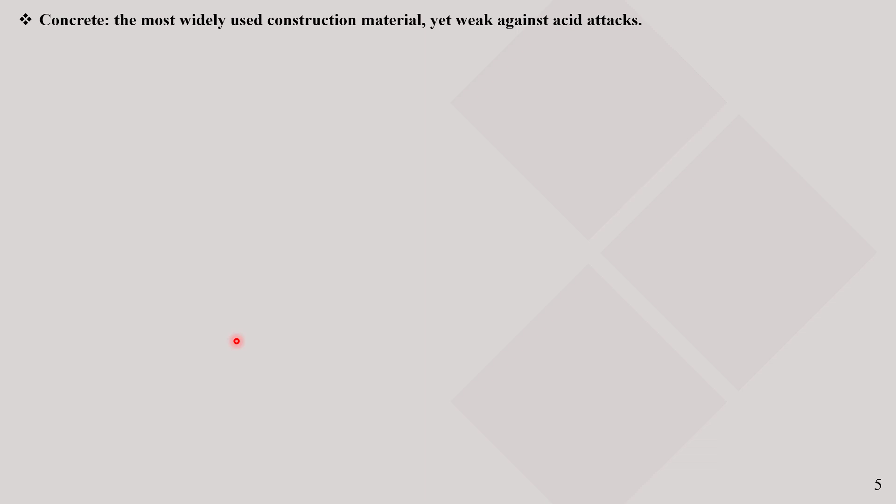Chapter 1: Introduction and Problem Definition. Concrete is the most widely used construction material. However, by nature, it performs poorly when exposed to acid attacks.

In today's world, the expansion of industries has led to an increase in pollutants, causing the acidification of water, soil, and air. This phenomenon results in acid rain, which poses a serious threat to both ecosystems and structures.

When acid rain comes into contact with concrete structures, it reacts with the compounds in cement, leading to porosity, cracking, and a reduction in the durability of the concrete.

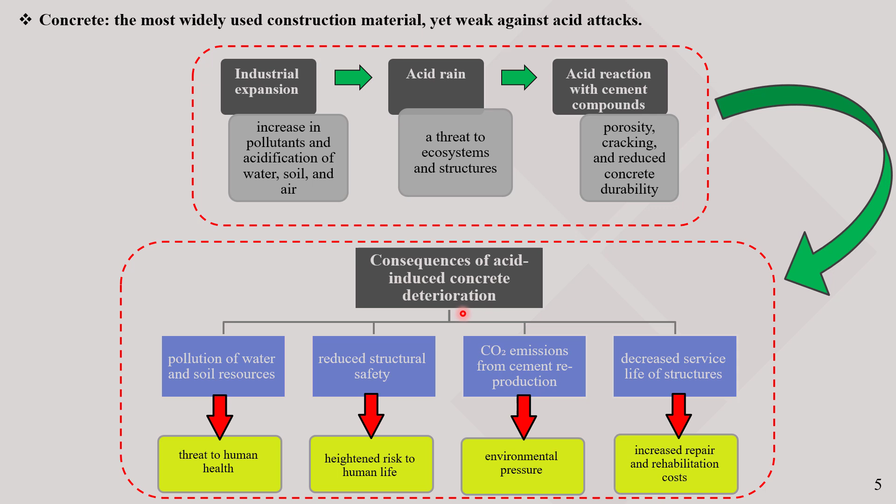These effects bring about several consequences: reduction in the service life of structures, increased CO2 emissions due to the need for additional cement production, decreased structural safety, and pollution of water and soil resources.

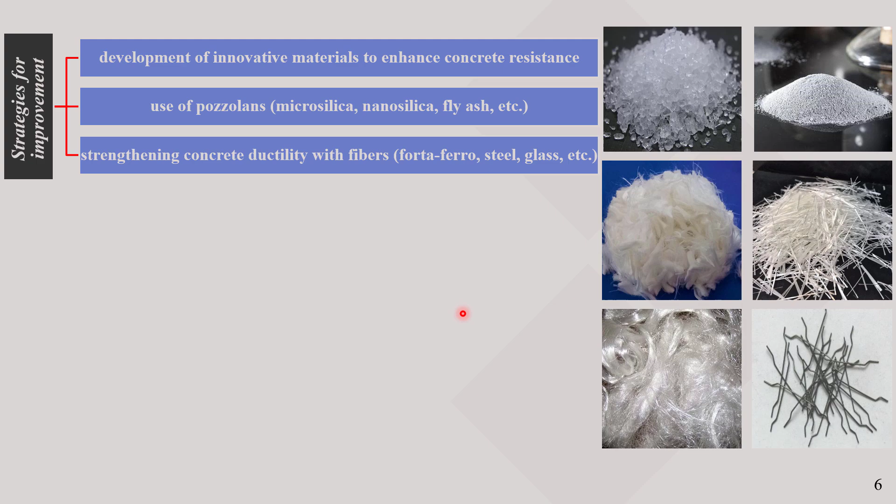There are several strategies to improve this situation. One solution is the use of modern materials. Another approach is the use of pozzolans such as microsilica, nanosilica, or fly ash. A further method is the use of fibers to enhance the ductility of concrete sections, such as steel fibers and glass fibers.

In this research, microsilica was selected as the pozzolan and Forta-Ferro fibers were chosen as the reinforcement, because Forta-Ferro fibers demonstrate good resistance in corrosive and alkaline environments.

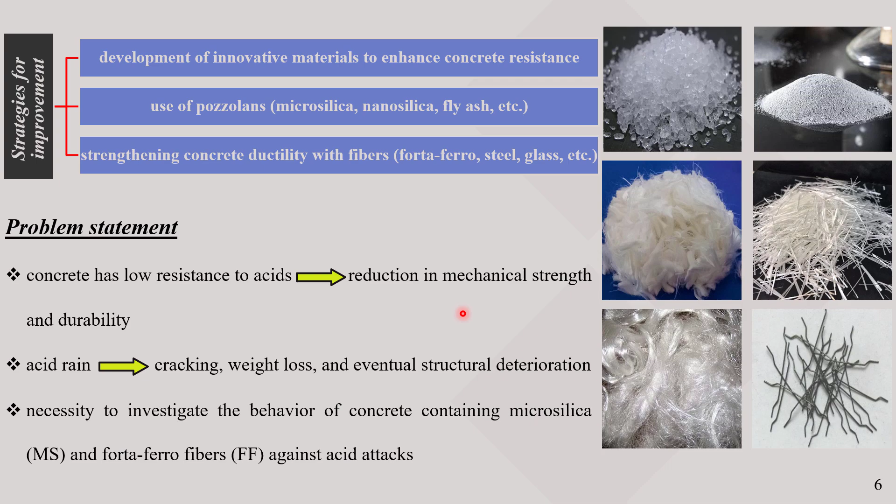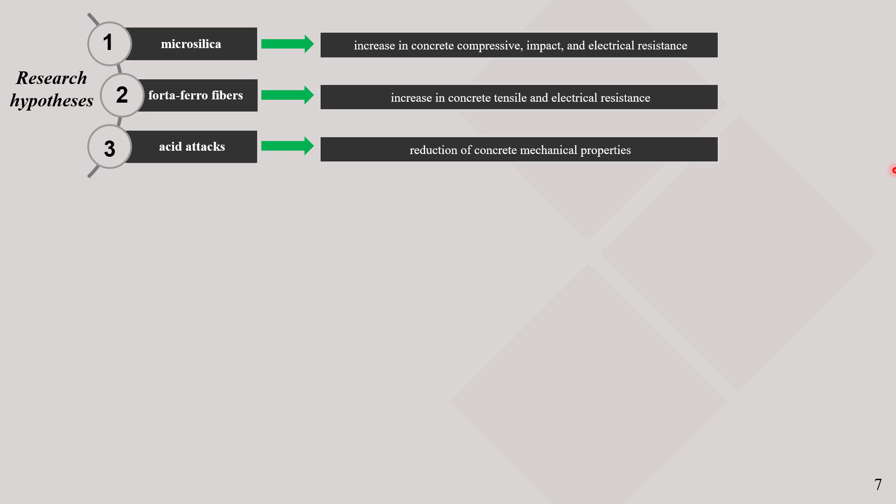Three main hypotheses were considered in this research. The first is that microsilica increases the compressive, impact, and electrical resistance of concrete. The second is that Forta-Ferro fibers improve the tensile and electrical resistance of concrete. The third is that acid attacks reduce the mechanical properties of concrete.

Accordingly, three main objectives were defined. The first was to investigate acid attacks and the compressive, tensile, impact, and electrical resistance of concrete containing microsilica and Forta-Ferro fibers. The second was to monitor physical changes in the concrete specimens, including weight, height, and diameter. Finally, the third was to provide a comprehensive picture of the behavior of modified concrete, in order to determine whether the combination of pozzolans and fibers can be effective, useful, and beneficial.

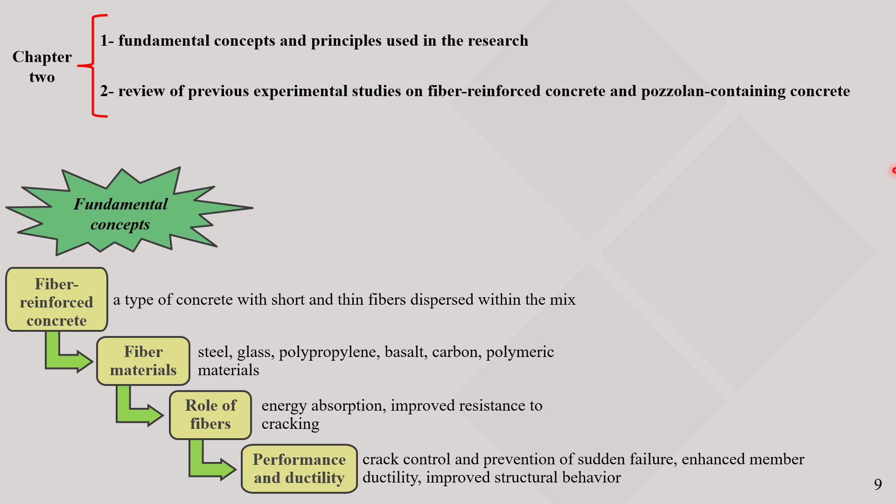In Chapter 2, we focus on the fundamental concepts and research background. First, we start with the basics of fiber-reinforced concrete. Concrete without fibers is referred to as plain concrete. The fibers can be steel, glass, carbon, or other types.

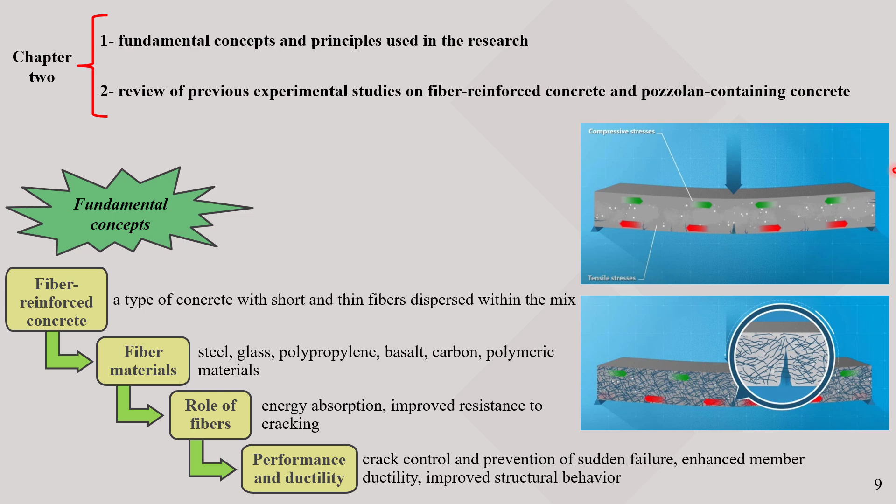The role of fibers is essentially to absorb energy and increase resistance to cracking. As shown in this figure, a force applied to a beam causes cracks in the tensile zone of the beam. If the beam is reinforced with fibers, these fibers can prevent crack propagation or at least significantly delay the formation of cracks.

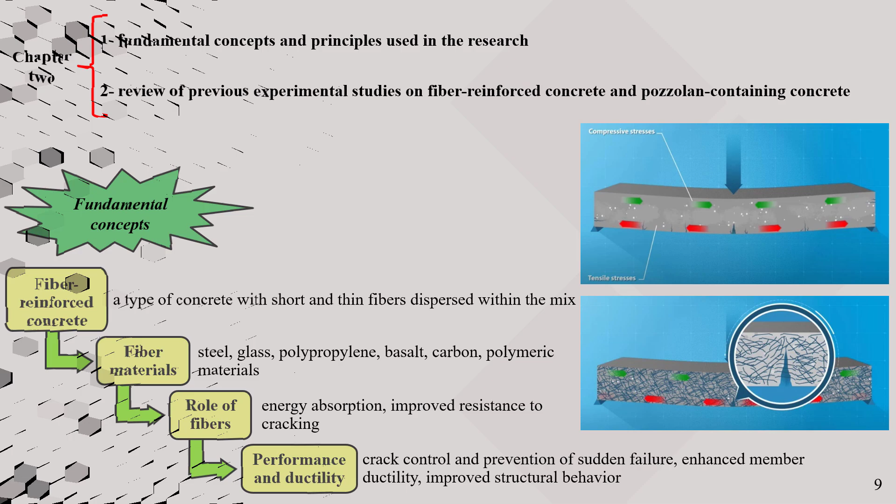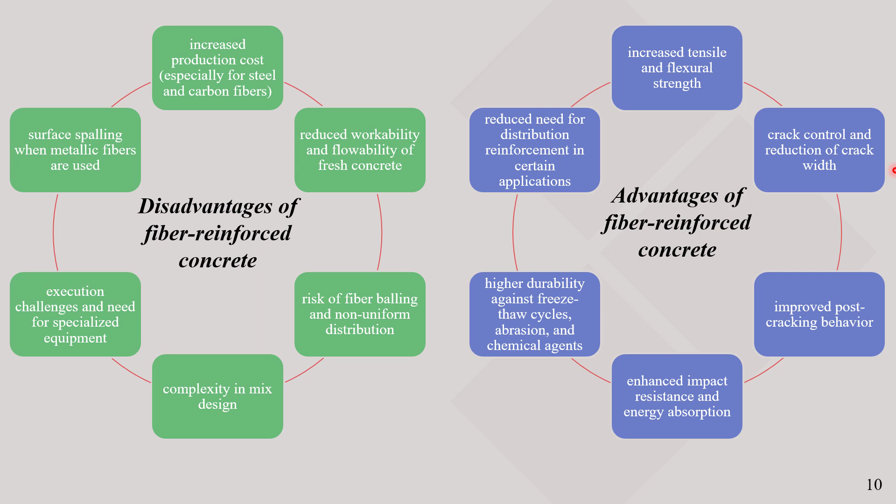Like any other material, fiber-reinforced concrete has certain advantages and disadvantages. The main advantages include increased tensile and flexural strength and control over crack widths. On the other hand, disadvantages include higher production costs, especially when using steel fibers, as well as reduced workability and flowability of fresh concrete.

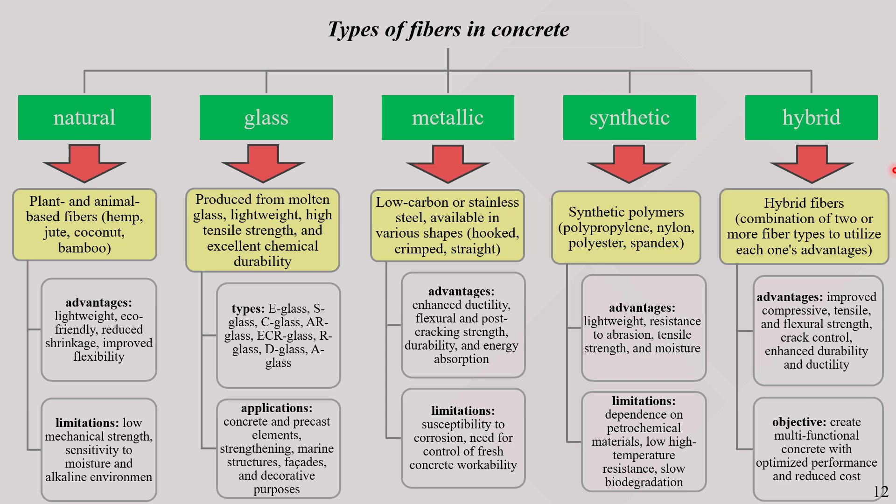Moving on to pozzolans, these are silico-alumina materials that initially have no binding properties but react with calcium hydroxide produced by cement hydration. Pozzolanic materials are categorized into natural and artificial types.

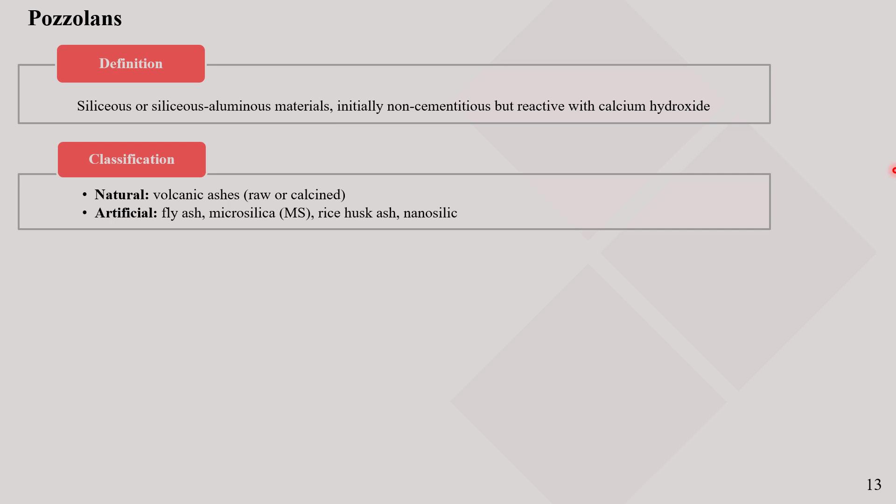Their advantages include increasing compressive strength, reducing cement consumption and consequently CO2 emissions, decreasing permeability, and enhancing bonding between the cement paste and reinforcement.

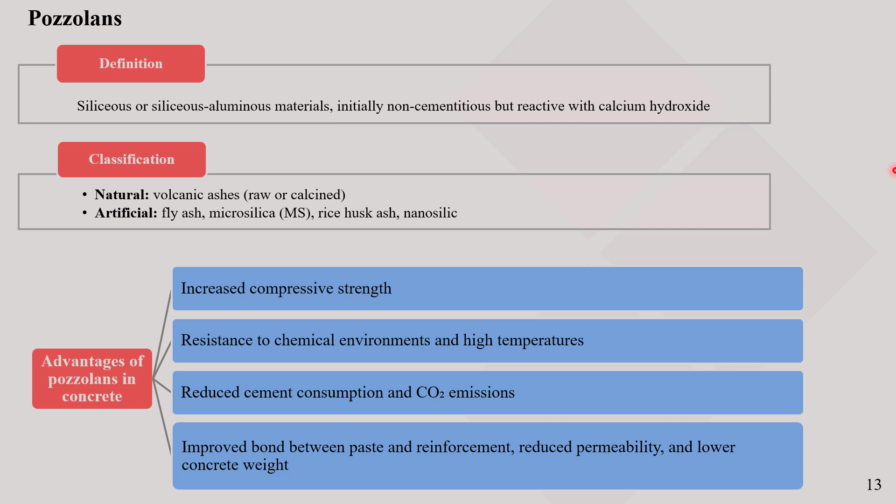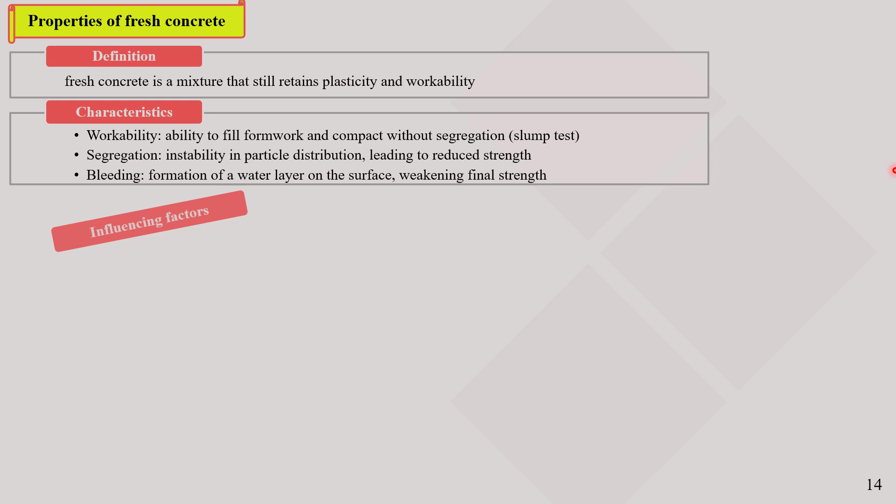Fresh concrete also has specific properties. It should maintain a plastic and workable state and not yet be hardened. Three main characteristics are assessed: workability, segregation, and bleeding. Factors such as water-to-cement ratio, aggregate grading, and curing temperature influence these properties.

In hardened concrete, characteristics such as compressive strength, stress, strain behavior, tensile strength, and modulus of elasticity are important. In this study, we focus specifically on compressive and tensile strengths.

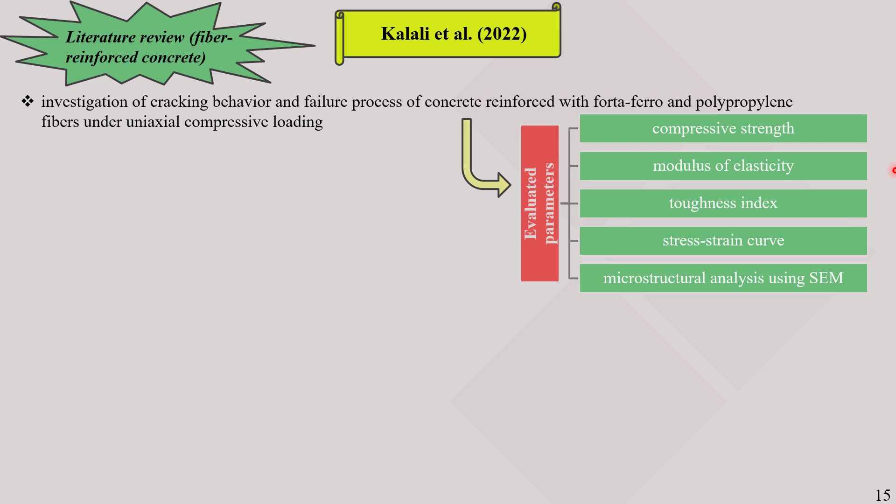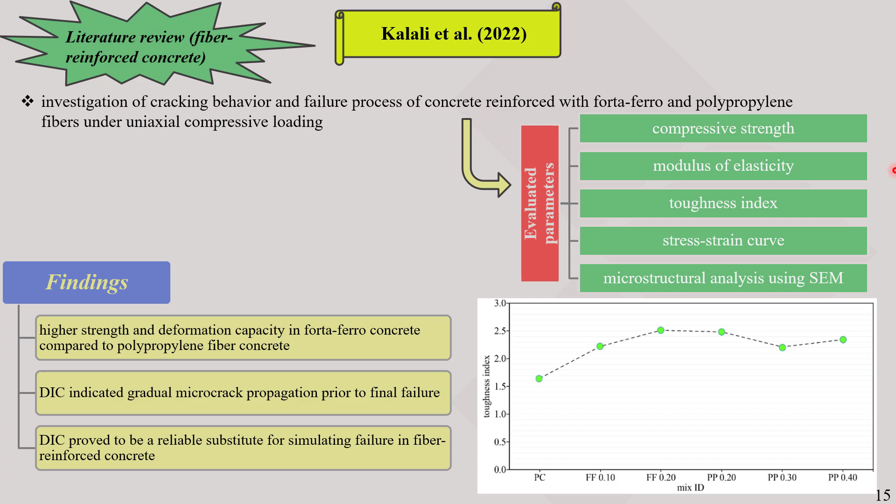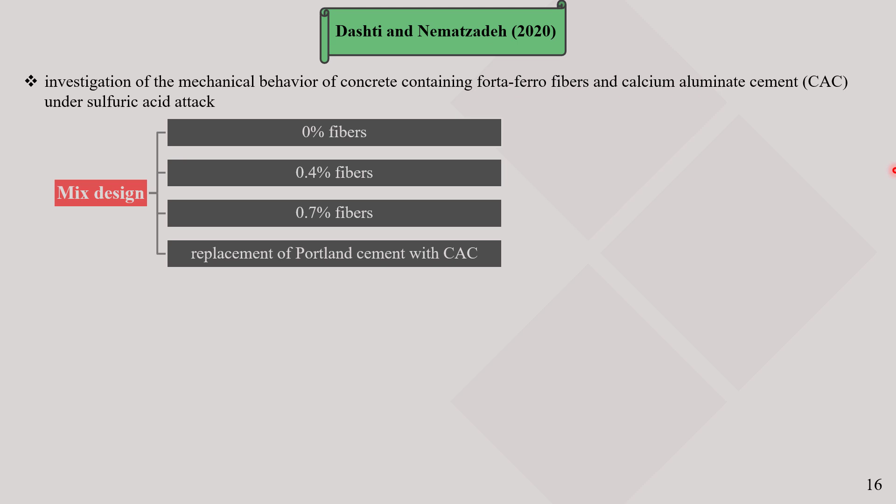The next article was conducted by Mr. Dashti and Nematzadeh. They investigated the mechanical behavior of concrete containing Forta-Ferro fibers and calcium aluminate cement, CAC, under sulfuric acid attack. In the mix design, fibers were used at three volumetric ratios: 0%, 0.4%, and 0.7%, and another mix design involved replacing 100% of Portland cement with CAC.

The key finding was that a 0.4% fiber content could enhance compressive and tensile strength, and full replacement of Portland cement with CAC increased strength by up to 70%. Overall, the acidic environment led to a reduction in compressive strength by up to 30% and tensile strength by up to 20%.

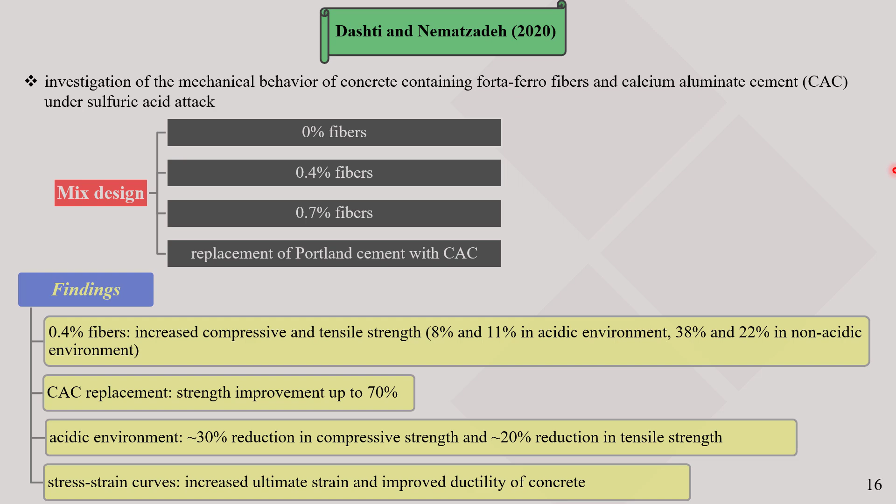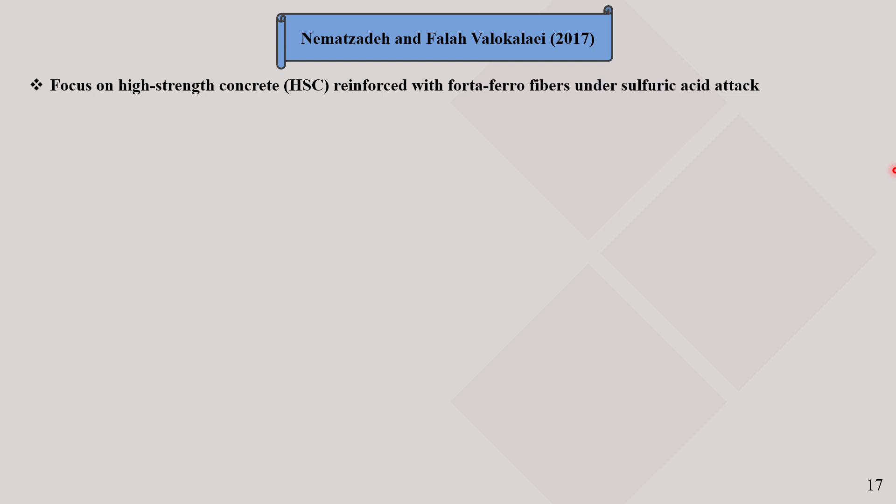The next study was conducted by Nematzadeh and Falah. They focused on high-strength concrete reinforced with Forta-Ferro fibers exposed to sulfuric acid attack. The main finding was that the presence of fibers helped control local cracking and prevented sudden failure.

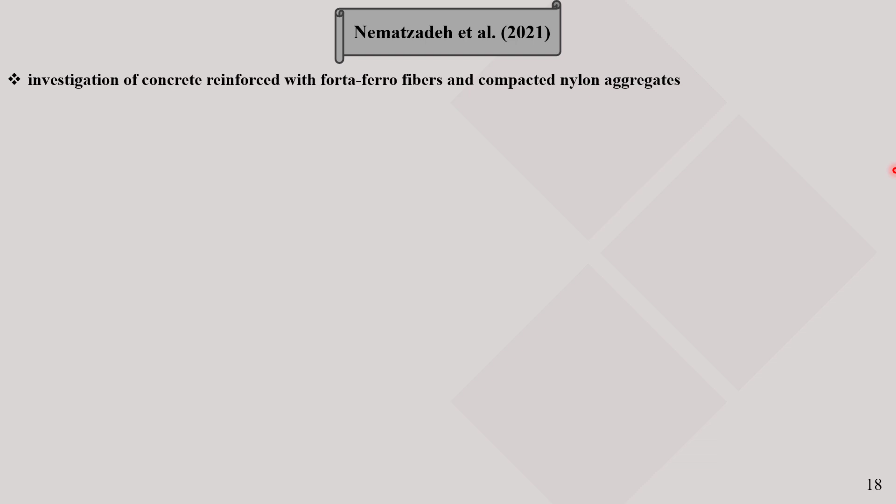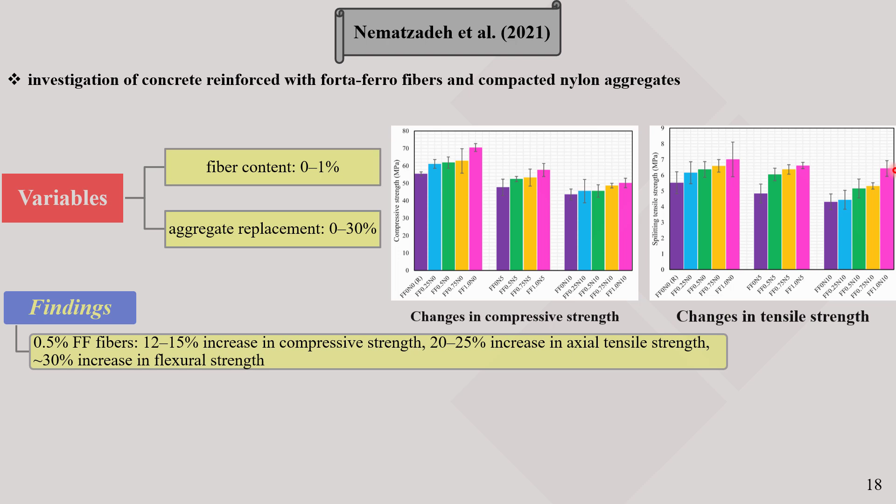Another study by Nematzadeh and colleagues examined concrete reinforced with Forta-Ferro fibers and compacted nylon aggregates. Both the fiber content and aggregate replacement ratio were varied. The key results indicated that 0.5% fiber content increased compressive strength by up to 15%, tensile strength by 25%, and flexural strength by 30%. Additionally, the nylon aggregates reduced permeability and water absorption.

Moving on to the pozzolanic materials studies, the first article was by Mr. Jain and colleagues, who investigated the effects of microsilica on concrete properties. The results showed that replacing up to 30% of cement by weight with microsilica positively influenced concrete strength. A limitation noted was that high microsilica content increased initial and final setting times by approximately 1.5 times. The graphs from these experiments are also presented in this section.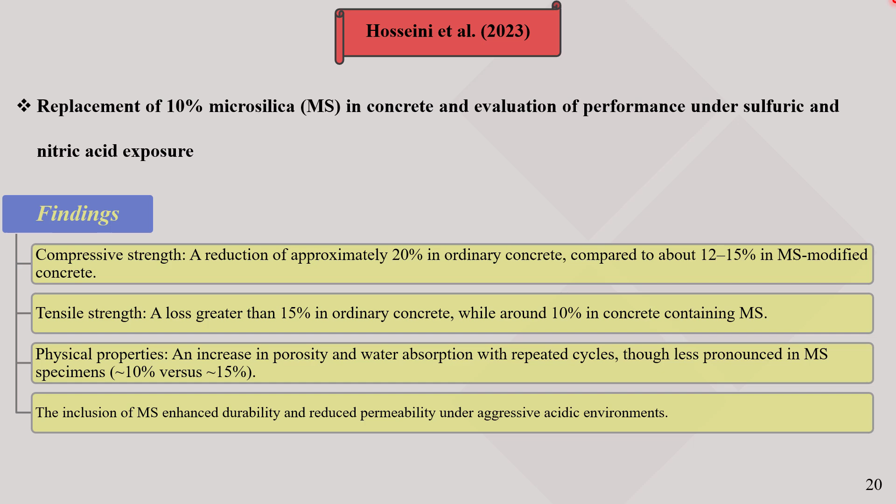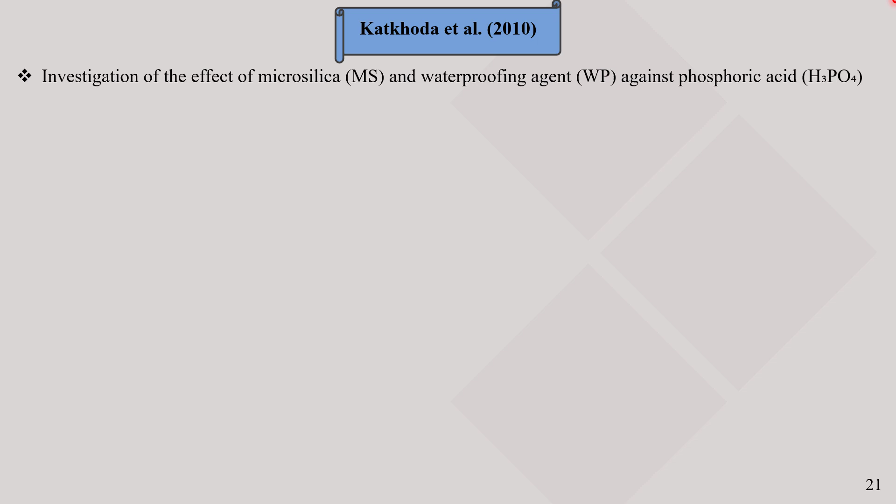Subsequent research by Mr. Hassan Katkhoda and colleagues examined the effects of microsilica and a waterproofing agent against phosphoric acid. Results showed that microsilica alone increased compressive strength by up to 15%, while the waterproofing agent alone reduced permeability and improved durability. The combined use of both materials increased compressive strength by up to 20% and provided optimal performance.

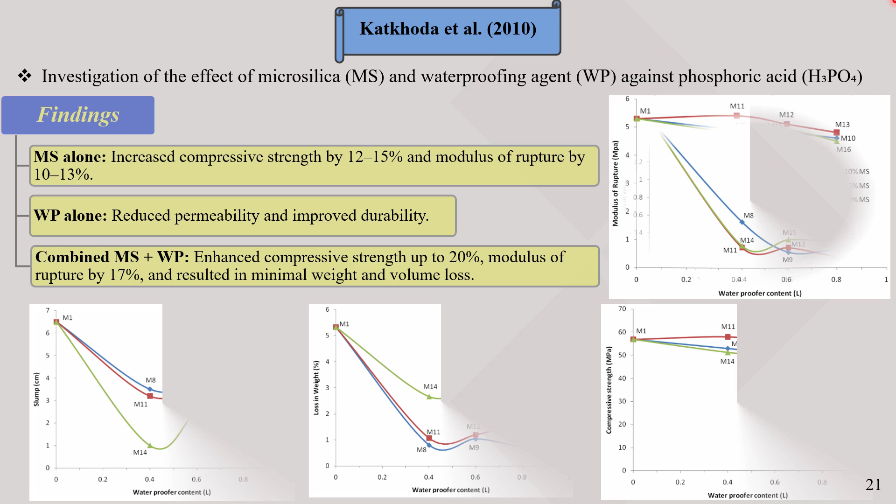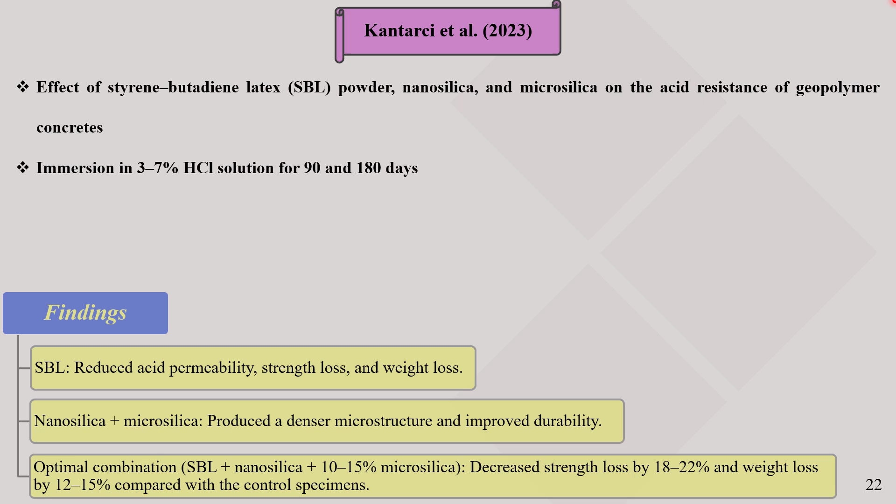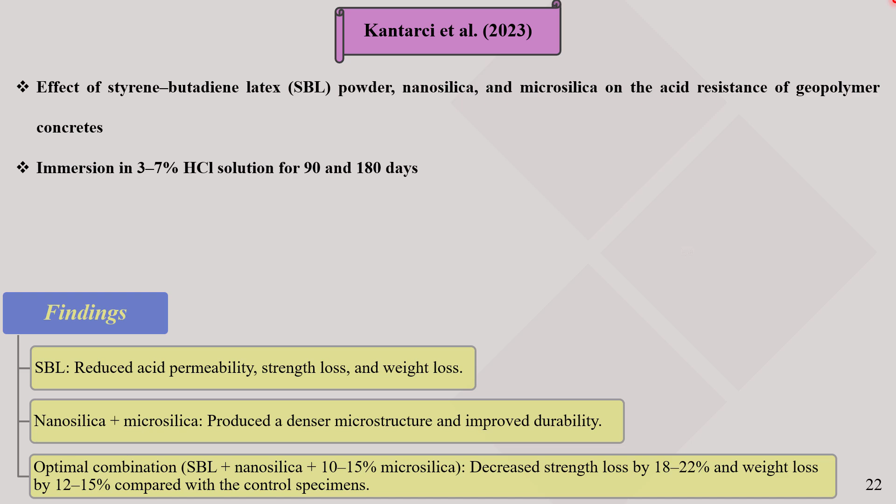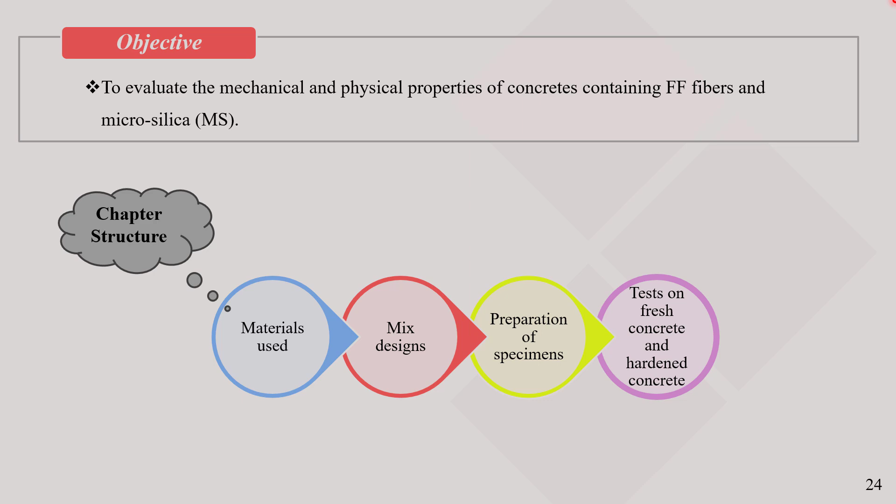Chapter 3, Laboratory Programs. In this chapter, our aim is to investigate the mechanical and physical properties of concrete containing Forta-Ferro fibers and microsilica. The structure of this chapter is organized such that first the materials used are introduced, then the mix designs are explained, followed by the sample preparation procedures, and finally, the tests performed on both fresh and hardened concrete are presented. Materials used.

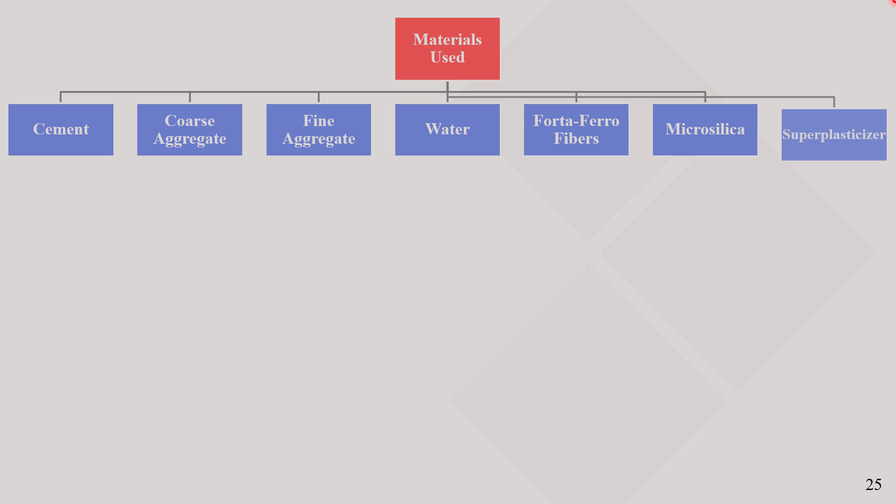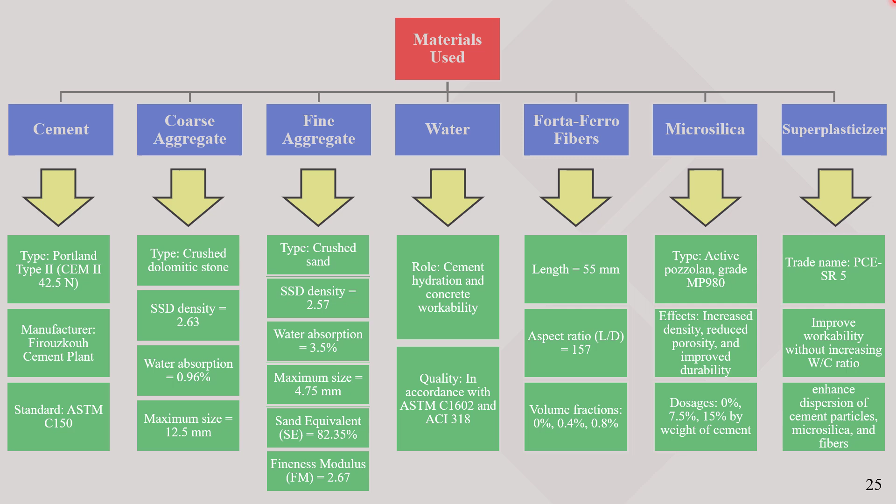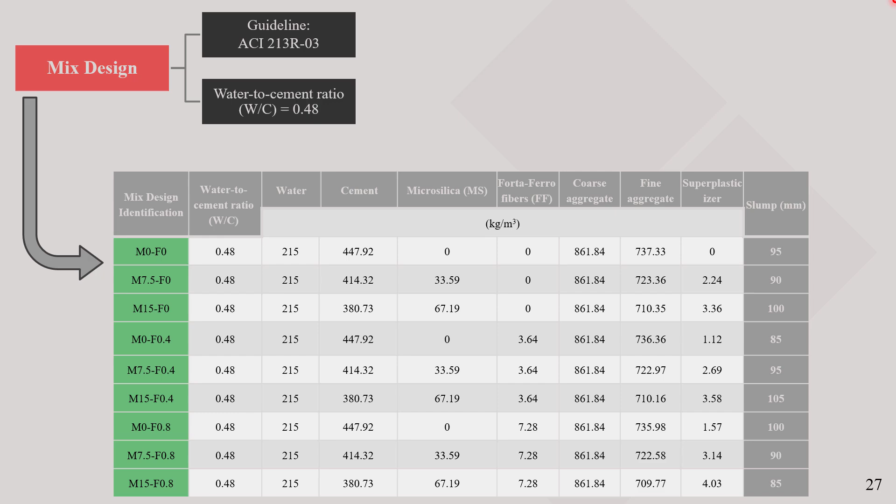Mix designs. The mixes were prepared with a fixed water-to-cement ratio of 0.48. The table includes 9 mix designs. The number for microsilica shows its percentage by weight. The number for Forta-Ferro fibers shows their volumetric percentage. For example, the sample M7.5F0.4 contains 7.5% microsilica by weight and 0.4% Forta-Ferro fibers by volume.

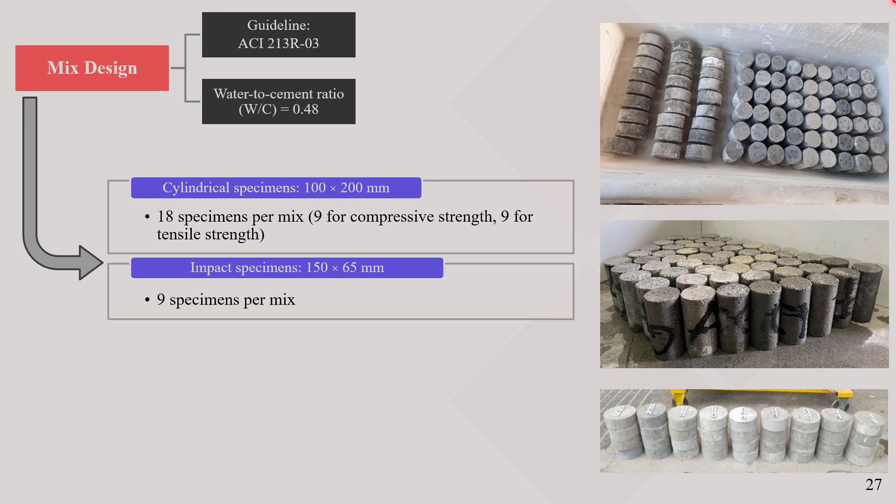Sample preparation: cylindrical samples were prepared for compressive strength, tensile strength, electrical tests, and dimensional change observation. The dimensions were 200 mm in height and 100 mm in diameter. For impact testing, samples were made with 150 mm in diameter and 65 mm in height.

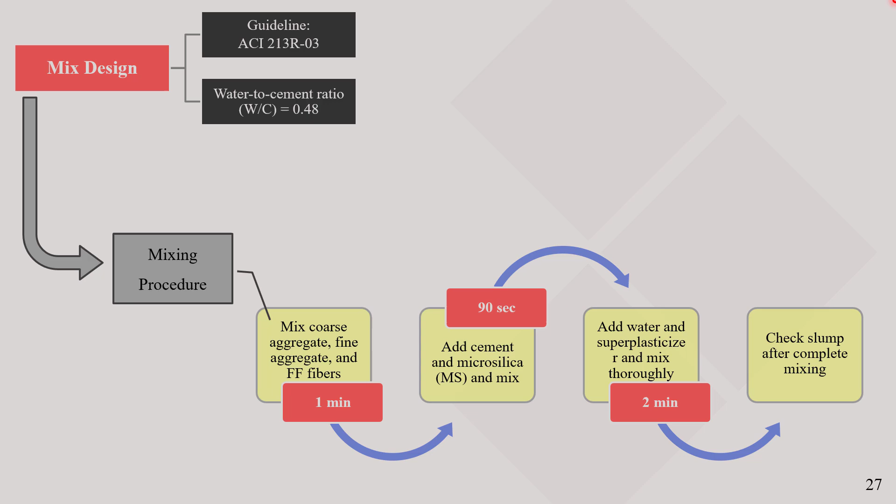Mixing procedure: the mixing was done as follows. First, coarse aggregate, sand, and Forta-Ferro fibers were mixed for 1 minute. Then, cement and microsilica were added. Finally, water and superplasticizer were added. After mixing, the samples were prepared for the slump test. After hardening, the other tests were conducted.

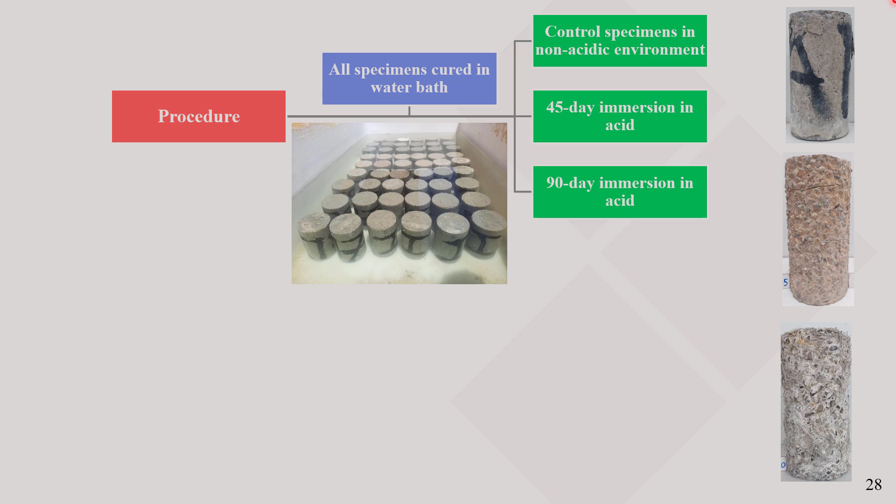Testing conditions: the tests were performed under 3 conditions. First, the non-acidic condition, where samples were tested directly after curing in a water bath. Second, the 45-day acidic condition, where 1/3 of the samples were tested after 45 days of immersion in acid. Third, the 90-day acidic condition, where another third of the samples were tested after 90 days of immersion in acid. Figures show the samples for each condition: the non-acidic sample, the 45-day acidic sample, and the 90-day acidic sample.

Tests conducted: the following tests were done on both fresh and hardened concrete: compressive strength, indirect tensile strength, impact resistance, dimensional changes, and volumetric electrical resistance.

Chapter 4: Analysis of experimental results.

We begin with compressive strength under non-acidic conditions. When microsilica is used alone, higher microsilica content leads to greater increases in compressive strength. Fibers alone did not have a significant effect, but the combination of microsilica and fibers slightly improved the strength and showed good synergy.

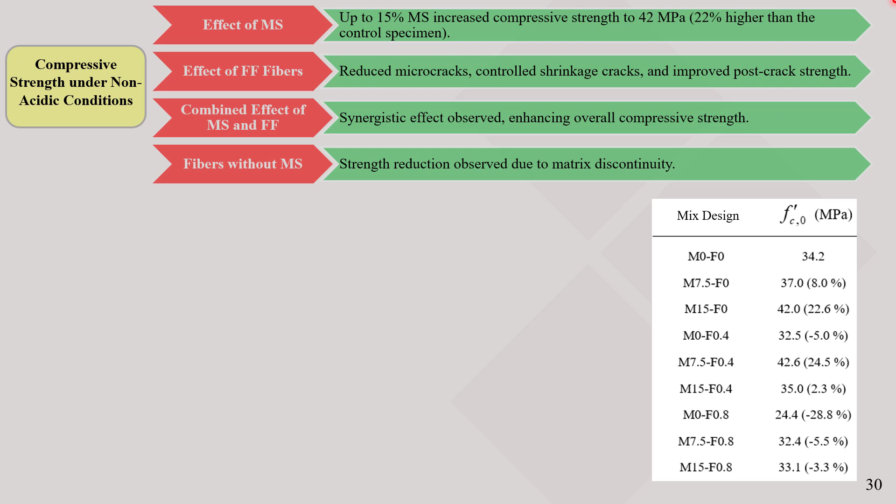Under the 45-day acidic condition, a degradation mechanism occurred. Hydrogen ions attacked the concrete and reacted with calcium hydroxide present in the mix, producing gypsum and ettringite. These secondary products are bulky and reduce the compressive strength. The results showed that higher microsilica content reduced strength stability, while higher fiber content improved compressive strength retention. Therefore, using both microsilica and fibers simultaneously, high fiber content with a moderate amount of microsilica can create a relative synergistic effect. Microsilica increases cement paste density, while Forta-Ferro fibers control cracks and prevent acid penetration.

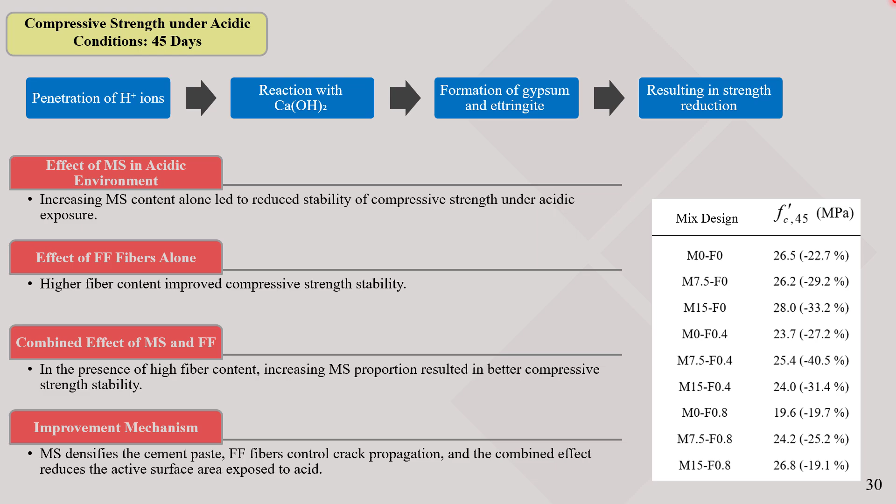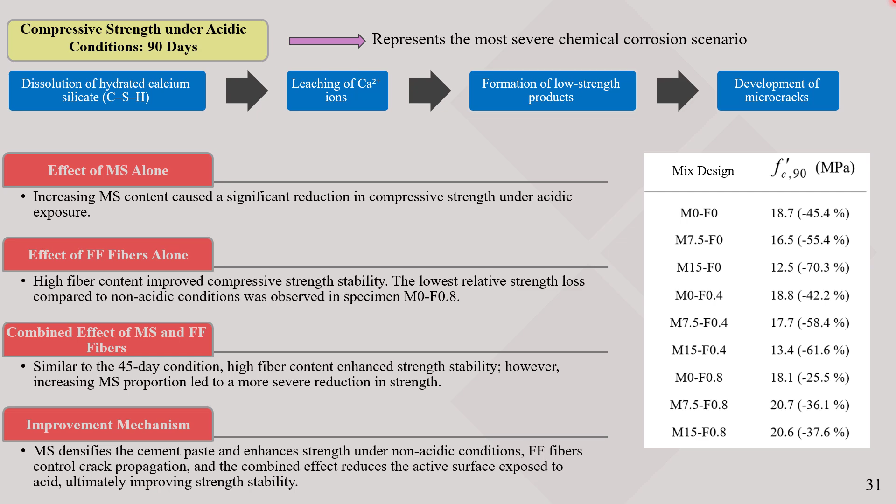For the 90-day acidic condition, the same mechanism occurred, but the chemical attack was more severe. The results were almost similar to the 45-day case. The final conclusion was that combined samples with the highest fiber content performed the best. Microsilica can be used at 7.5% or even 15%, but the fiber content should be maximized.

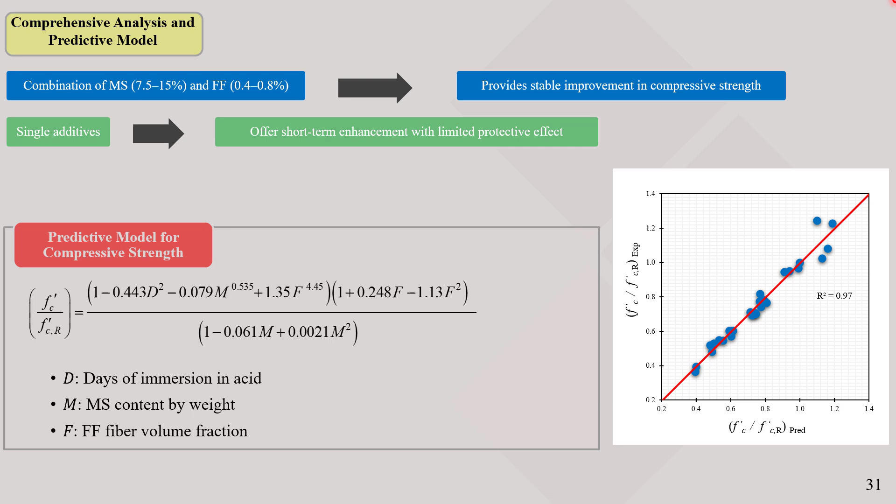For the indirect tensile strength test, 3 factors were influential: the quality of the cement paste microstructure, the bond in the transition zone and stress distribution, and crack control. Under non-acidic conditions, fibers had a positive effect, and the best performance was observed in the combined samples.

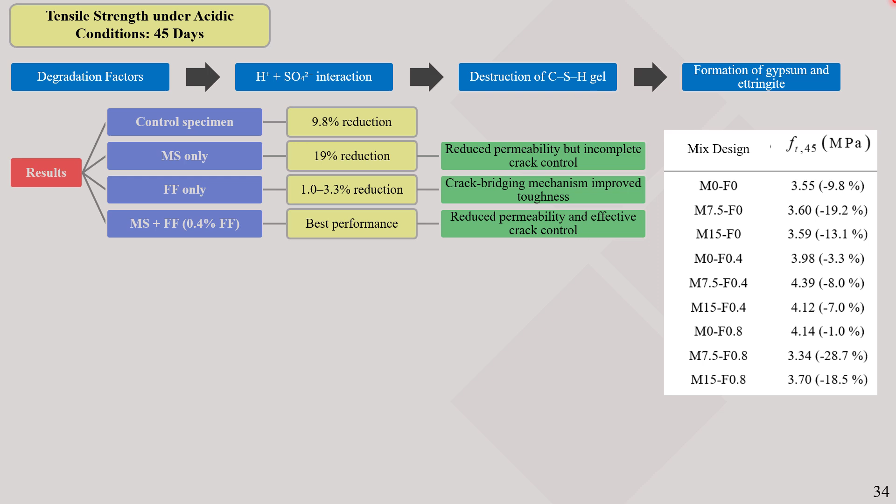Under the 45-day acidic condition, the same degradation mechanism occurred, and once again the combined samples performed best, especially when 0.4% fibers were used. In the 90-day acidic condition, samples containing only Forta-Ferro fibers showed only a 1.9% reduction in strength compared to the non-acidic condition, indicating stable performance. Combined samples with the highest fiber and microsilica content also exhibited effective synergy, with a strength reduction of approximately 22%, performing better than the reference sample.

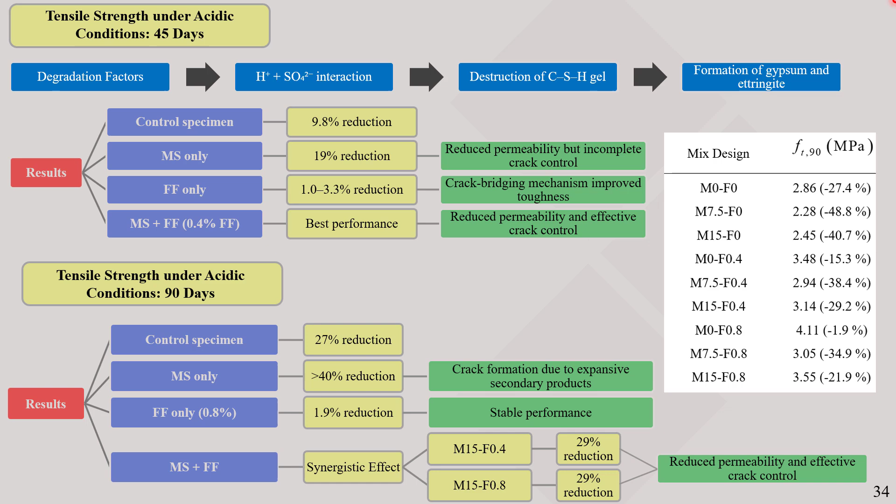This slide presents the results of the indirect tensile strength test. Samples containing only microsilica, only Forta-Ferro fibers, and the combined samples are all shown in the chart. The graph illustrates the overall trend of tensile strength variations under the three different test conditions.

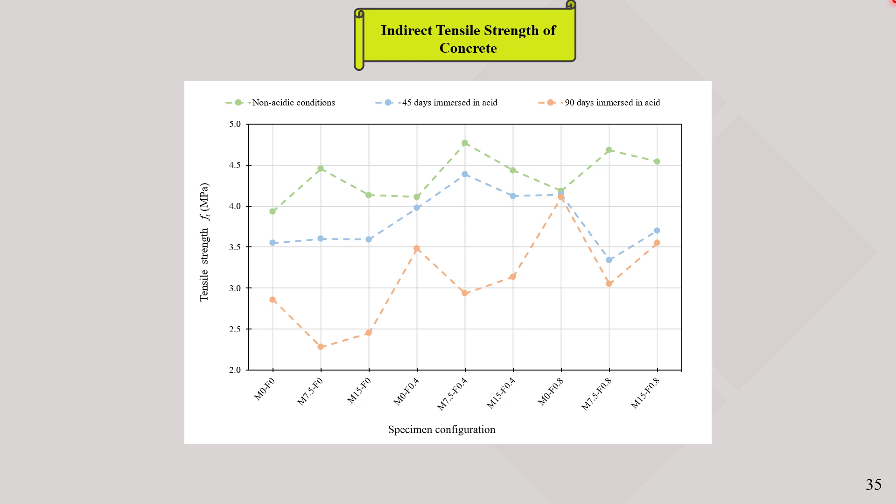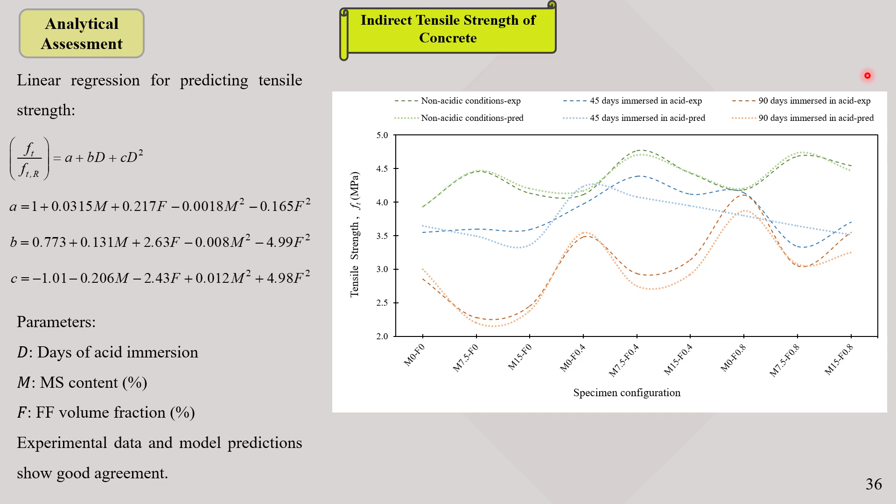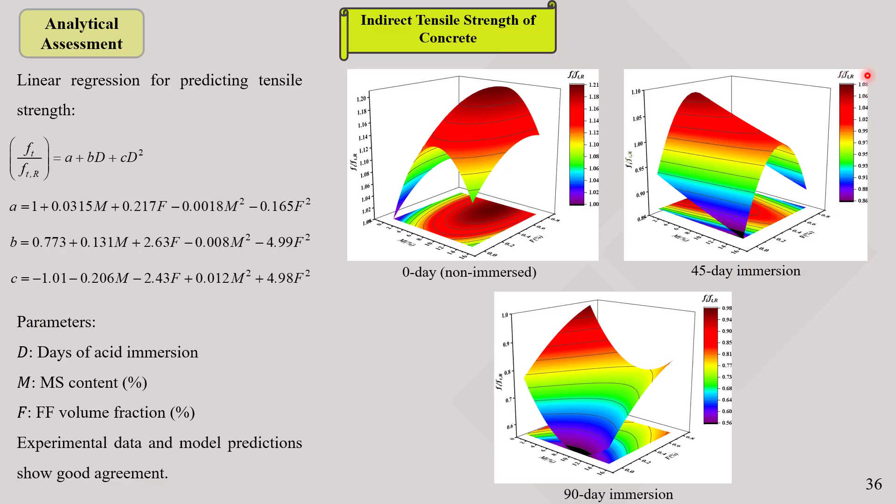We now turn to impact resistance. Two criteria are important: first, the energy absorbed up to the first crack, which indicates the onset of damage, and second, the energy absorbed until complete failure, which represents the toughness of the sample.

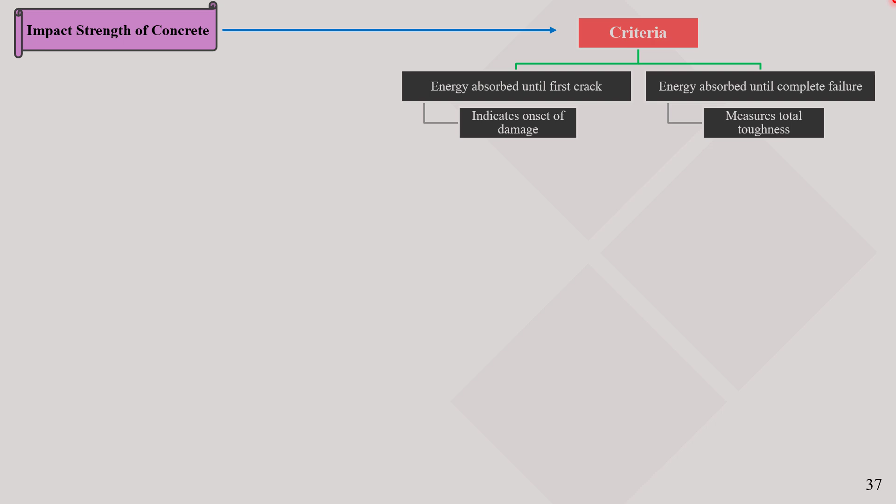Under non-acidic conditions, adding microsilica alone makes the concrete more brittle and reduces impact resistance. The higher the Forta-Ferro fiber content alone, the greater the impact resistance, with 0.8% fibers showing the maximum resistance.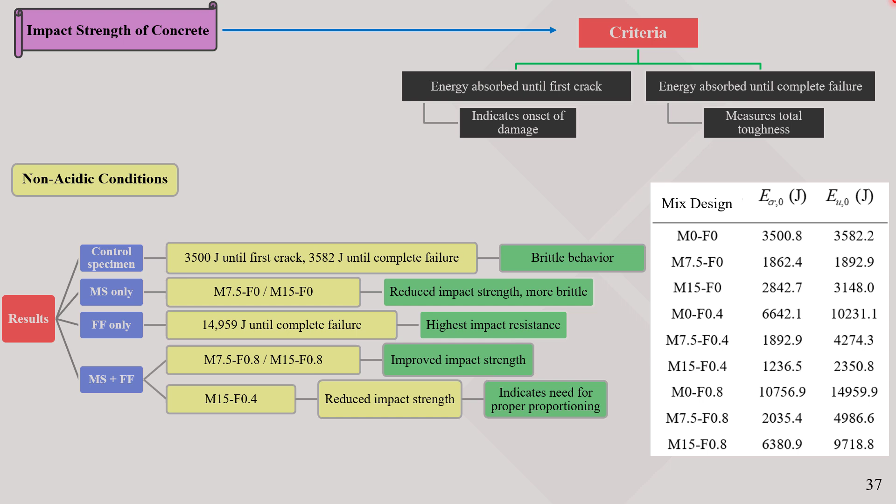In the 90-day acidic environment, using microsilica alone caused a severe reduction in resistance, while Forta-Ferro fibers provided the highest impact resistance. Combined samples with a high microsilica content, such as 15%, experienced a considerable drop in resistance compared to the 45-day condition. Therefore, the optimal approach for impact resistance is to use a high proportion of Forta-Ferro fibers or a combination of 7.5% microsilica with a high fiber content.

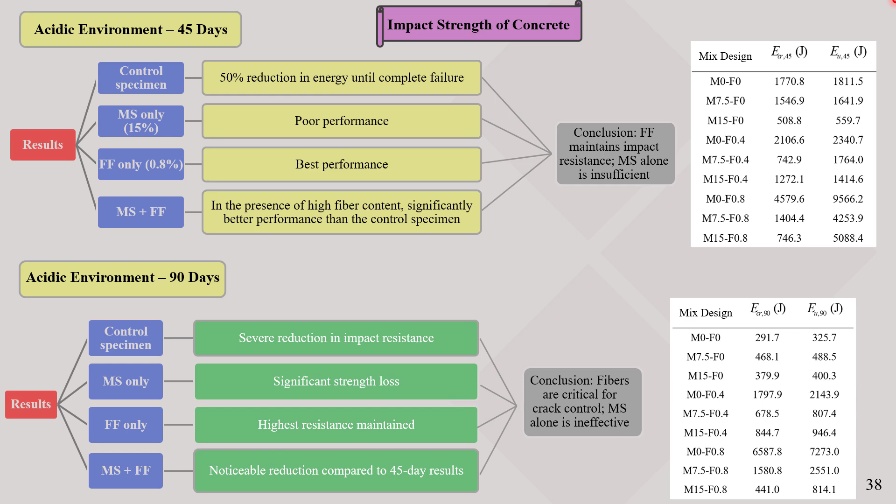We now move on to visual deformation and durability. In this experiment, three parameters were examined: weight loss, reduction in diameter, and reduction in height.

Regarding the effect of microsilica without fibers, under non-acidic conditions, replacing part of the cement with microsilica caused the samples to have slightly lower weight compared to the reference sample. Under acidic conditions, the higher the microsilica content, the greater the loss of weight and diameter.

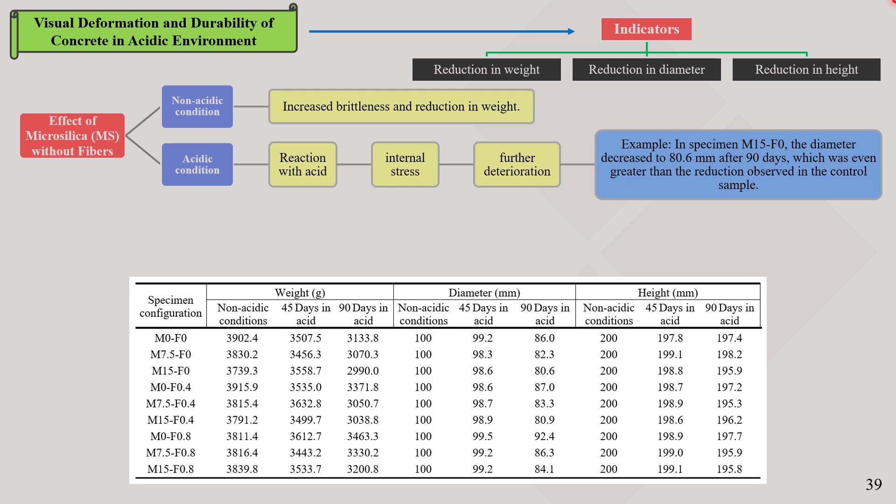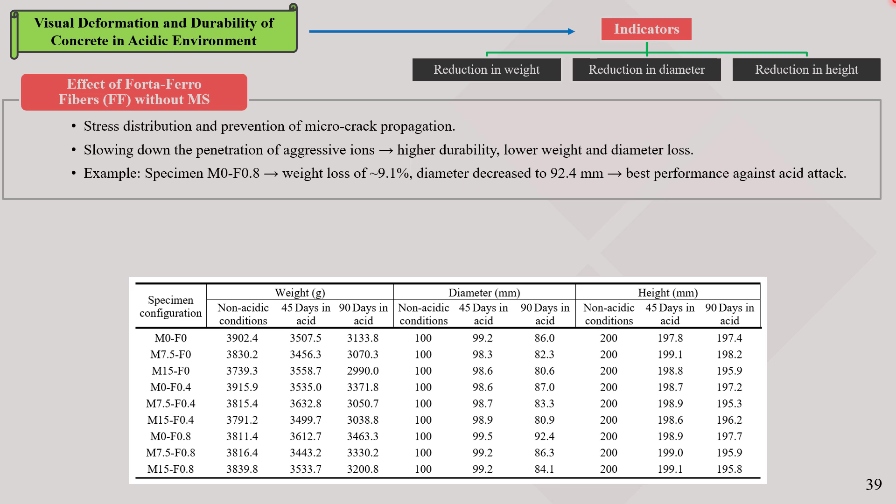In contrast, increasing the fiber content reduces weight and diameter loss, as the fibers help distribute stress and prevent the propagation of microcracks. When microsilica and Forta-Ferro fibers are used in combination, performance is moderate and relatively stable, provided excessive microsilica is not used. Overuse of microsilica can lead to brittleness and make the concrete sample more vulnerable to damage.

We now turn to the volumetric electrical resistivity test, conducted to evaluate the durability and permeability of concrete. When examining the effect of microsilica without fibers, under non-acidic conditions, increased concrete densification led to higher electrical resistivity. However, under acidic conditions...

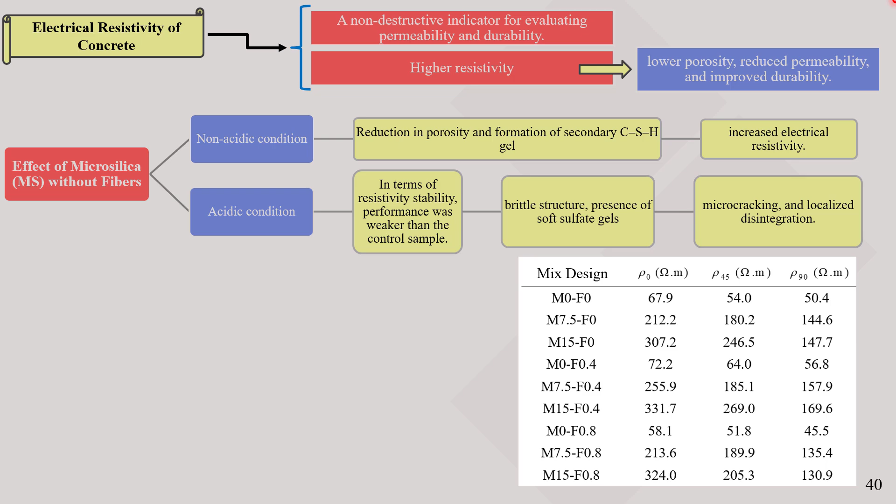Increasing the microsilica content caused a relative decrease in resistivity compared to the reference sample. When analyzing the effect of fibers without microsilica, the fibers had little impact on volumetric electrical resistivity, and at higher percentages, the resistivity even decreased compared to the reference sample.

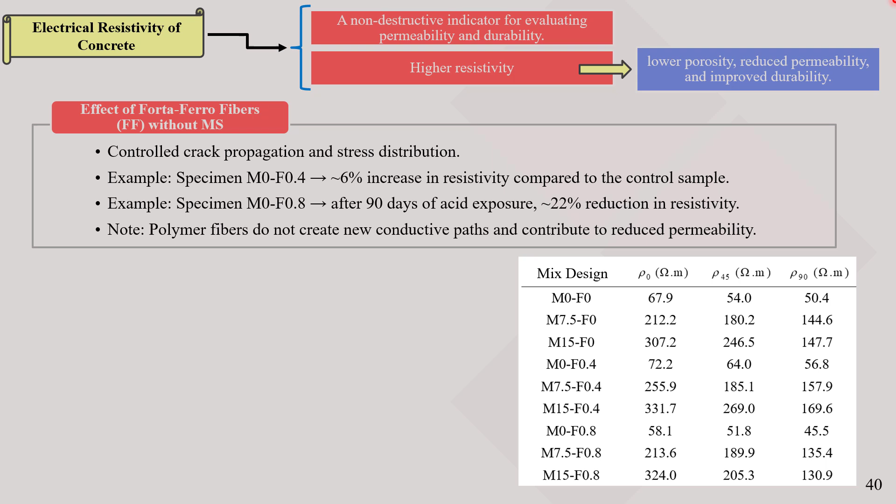Nevertheless, over the 90-day period, the relative resistivity was better maintained because the fibers blocked penetration paths and prevented acid from entering the concrete. The combined effect of microsilica and fibers showed that using an optimal ratio, 0.4% fibers and 7.5% microsilica, reduces permeability and increases resistivity.

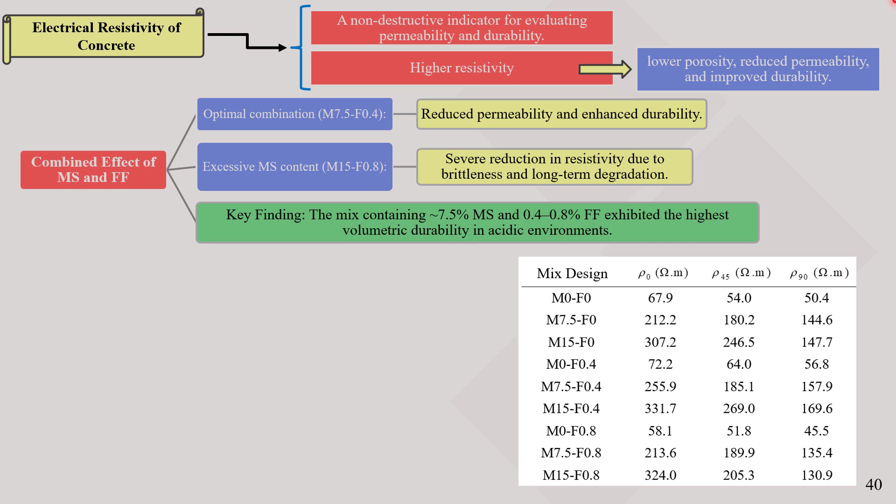The predictive model showed good agreement with the experimental results, and response surface diagrams were provided for 0-day, 45-day, and 90-day conditions. The reference sample is the one without any additives.

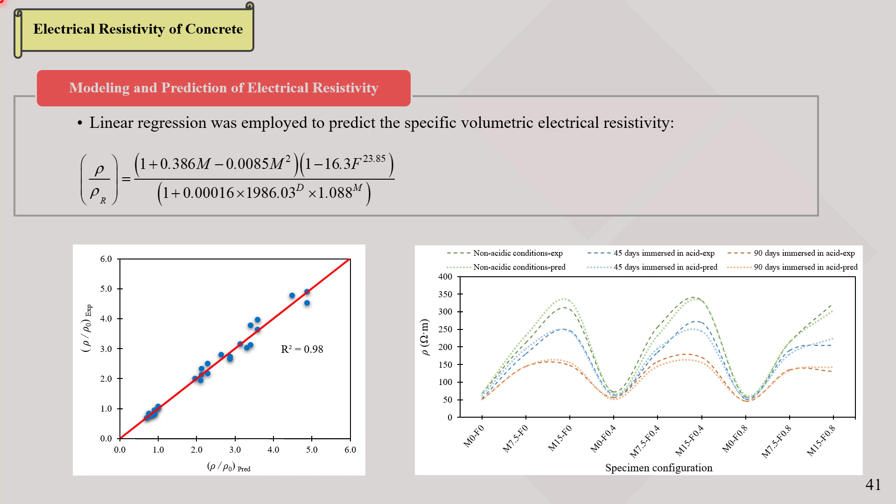Finally, we reach the last chapter, results and recommendations. To summarize the findings briefly, the presence of microsilica alone under acidic conditions does not have a positive effect on compressive strength and can even lead to further reduction.

On the other hand, when only fibers are present, the compressive strength remains relatively stable, showing the least relative reduction among all mixtures. However, when both additives are used simultaneously, samples with the highest fiber content along with a certain amount of microsilica, up to 15%, exhibited excellent performance in terms of both compressive strength and strength stability after 90 days in an acidic environment, compared to the reference sample.

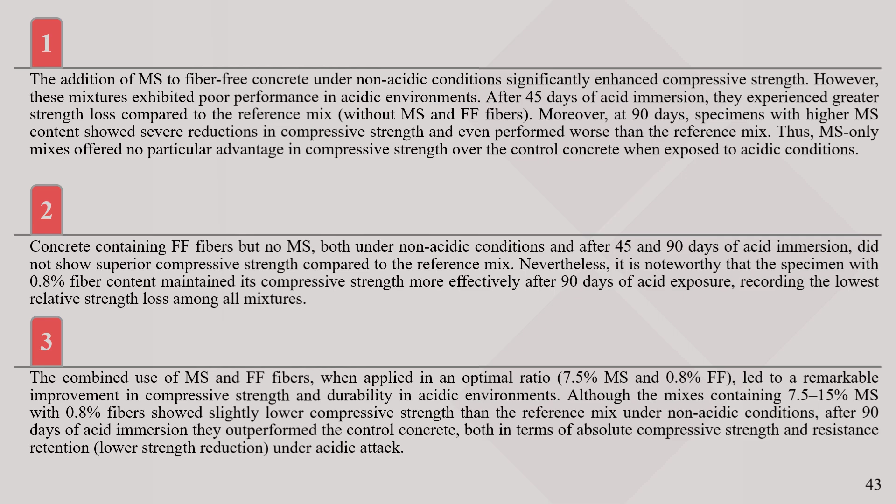For the indirect tensile strength test, similar results were observed. Fibers helped maintain the strength, while adding microsilica improved the concrete's microstructure, resulting in desirable tensile strength for the concrete samples. Regarding the impact test, it was found that fibers increased impact resistance, whereas microsilica caused brittleness and reduced resistance.

Additionally, the energy required to initiate the first crack and to reach complete failure decreased significantly with microsilica, making the samples more brittle. In terms of visual deformation, the trend was similar: using microsilica alone under acidic conditions reduced performance relative to the reference, while fibers without microsilica provided better long-term performance, resulting in the smallest reductions in weight, diameter, and height.

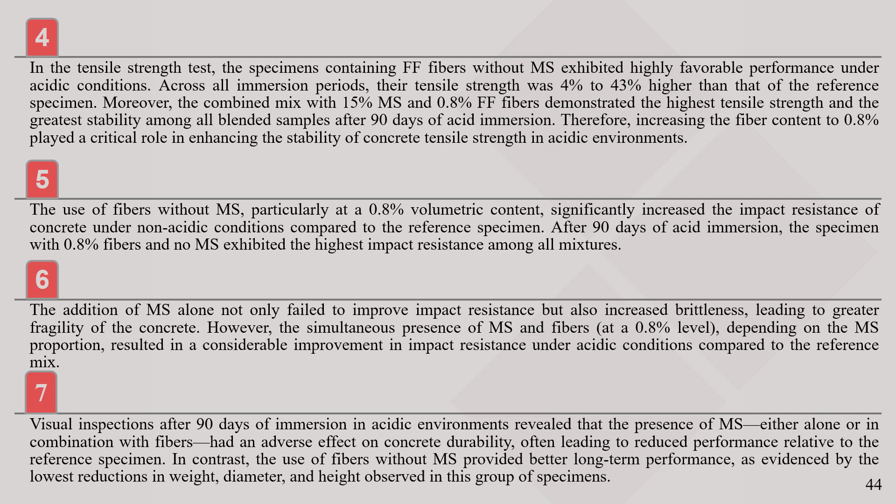Regarding volumetric electrical resistivity, under non-acidic conditions, using microsilica alone increased resistivity 3 to 4.5 times compared to the reference sample. Fibers alone did not have a significant effect, but when combined with microsilica, they helped maintain resistivity over the long term and greatly improved electrical stability compared to the reference.

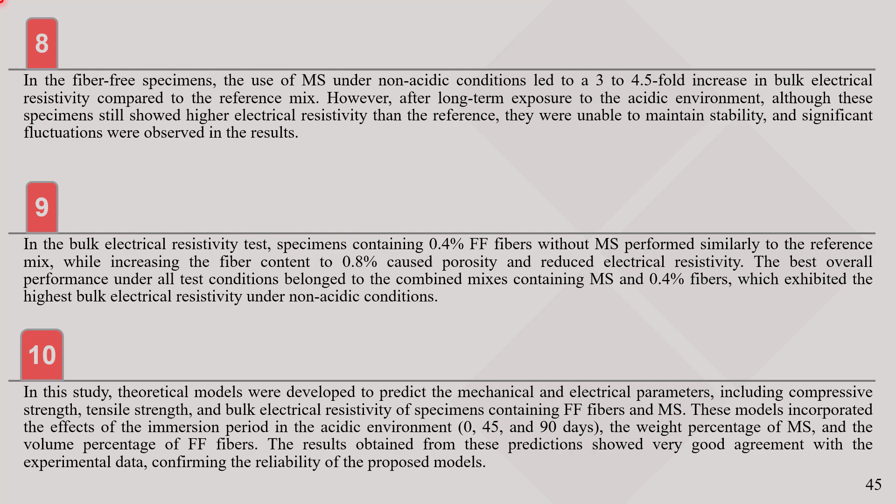Finally, theoretical models were developed for all three tests. The results obtained from these models showed very good accuracy when compared with experimental data, and there was excellent agreement between model predictions and laboratory results, confirming the validity of the proposed models. These are also recommendations for future research.